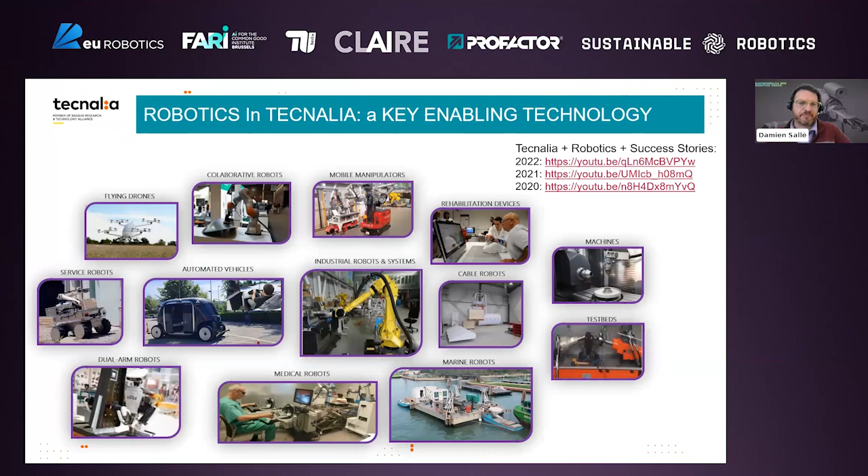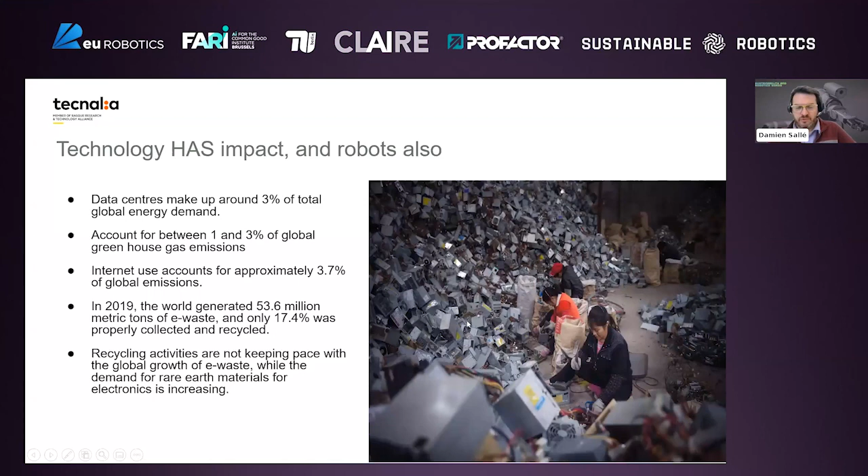So we're all in this webinar very aware that we need to do something if we want to keep life on this planet possible. We are also roboticists or interested in that, so we should be aware that our technology also has an impact, both because we create lots of electronic waste, and also because we use lots of energy for these robots to be active.

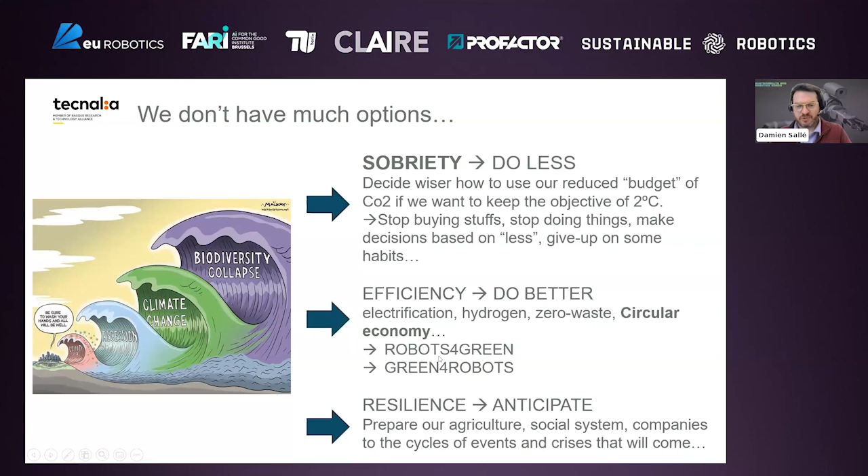So we're going to talk about efficiency, how to do stuff with robots, but the first thing we should do as a society is to focus on sobriety. So do less and decide what we want to do with the budget that we have, the CO2 budget of activities, if we want to keep the objective of 2 degrees. Okay, I think we don't hear it enough. We should also decide to not do things. When we decide to do things, we should do them better, more efficiently. And here we have ideas about robots for the environment, robots for green, and also how we can improve the robots themselves. These are 2 points that we're going to look at today.

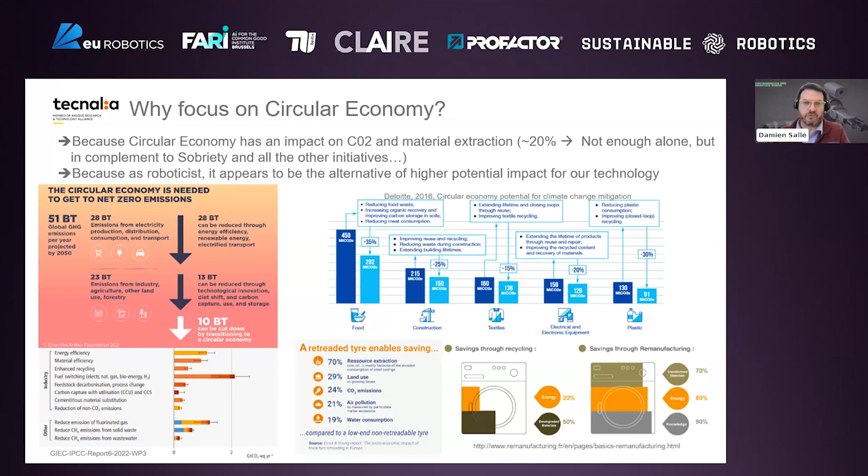So when a few years ago I wanted to apply robotics to provide one more grain of sand on that, I asked where we should focus. And we decided to focus in Tecnalia on circular economy because for robots, it appears to be a good sector where we can do something. And also we can apply automation and robotics to a sector that actually has an impact on CO2 and material extraction, about 20%. So of course, it's not enough. Of course, we need to change the energy sources. We need to go for electrification, stuff like that. But robotics can't help on that. So circular economy is one of the possible entry points for us.

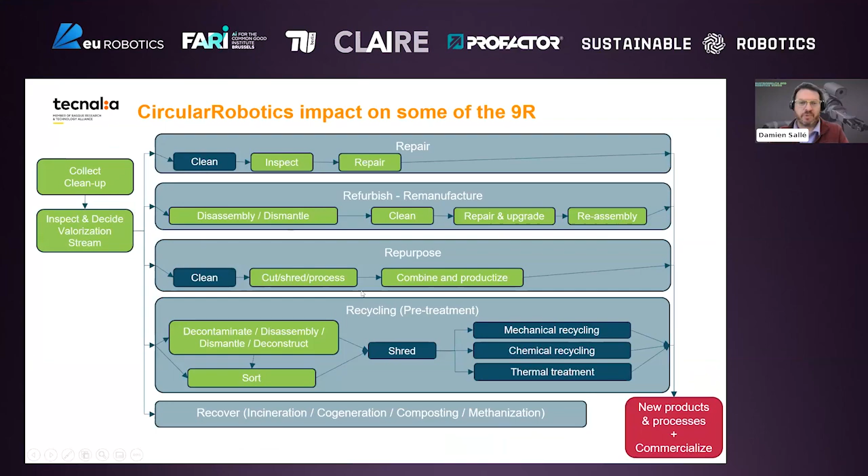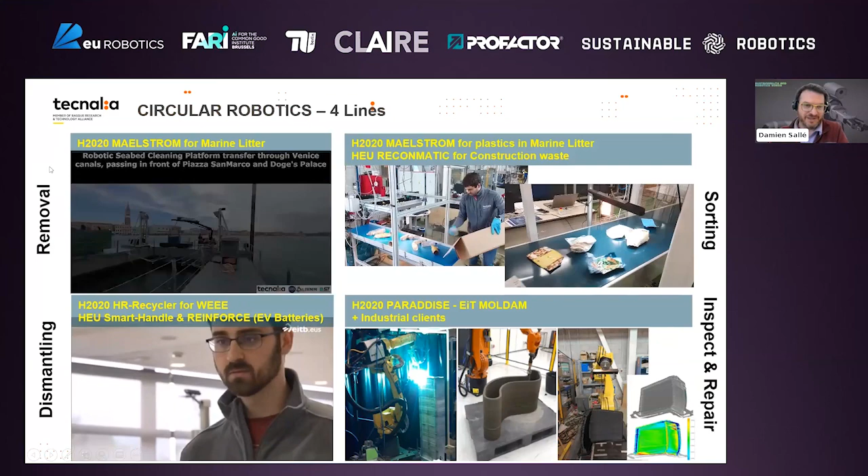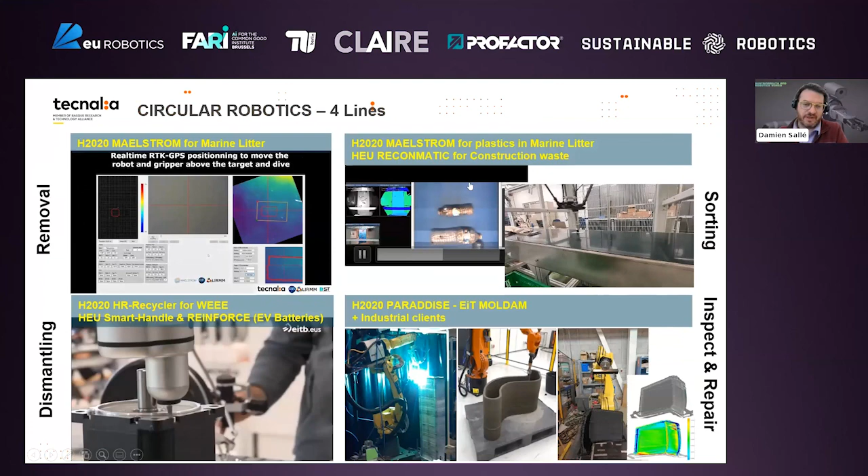Okay, so we had a look at what processes in this circular economy robots could impact. And we launched different projects, different lines with EU funding at the moment. We have a few clients, but it's not very profitable: cleaning the environment, as Sharat mentioned, removing plastics from under the sea, sorting waste from marine litter, construction waste, other streams, stuff like that. We now also work on dismantling electric vehicles or electronic components. And there's also a fourth line on inspection and repair.

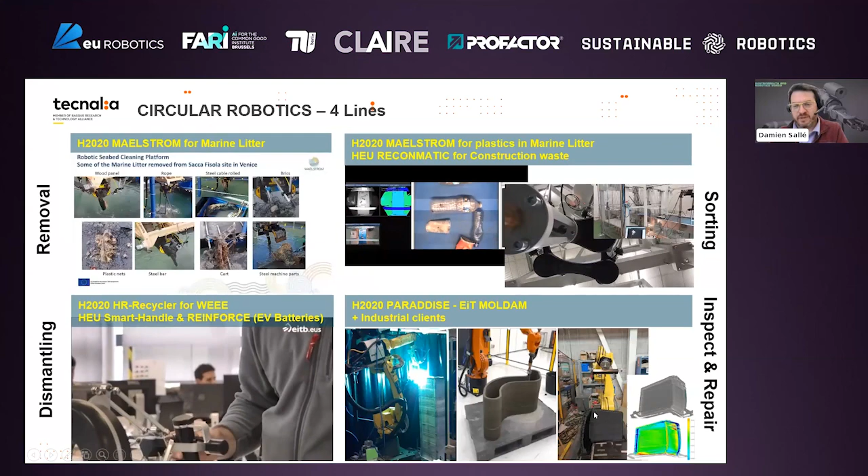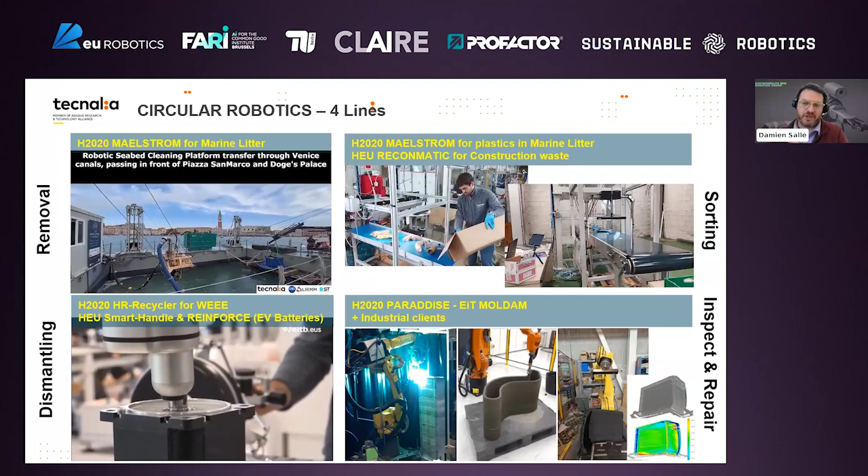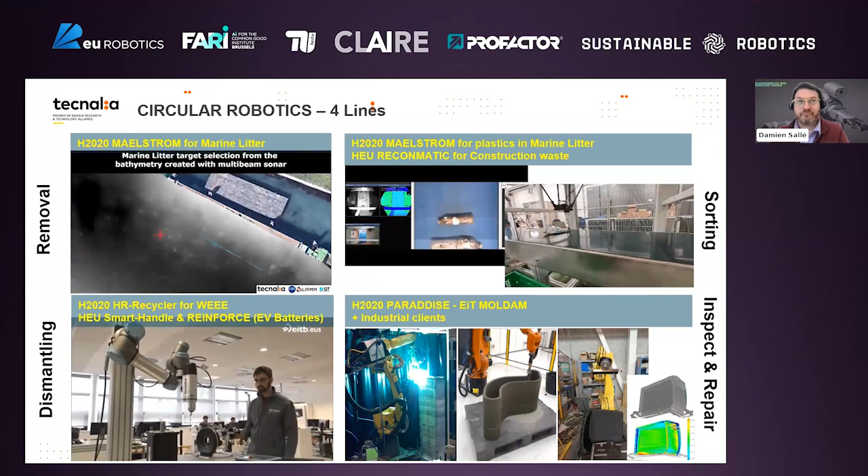We can use robotics, 3D vision, artificial vision, 3D printing, stuff like that, so that we can repair and maintain and increase the life of the components. Today's webinar is not so much on this part, so I will skip it here. But I think it was important just to mention that robots can also be used to try to improve, let's say, the impact we have on the environment.

Now, the other important question is, could we make robots that impact less? Okay, we've seen the first presentation where they propose polymers that can repair themselves, that can be recyclable. That's good. We had a talk just before on LCA. I will come back to this point at the end of my presentation.

But if we talk more from an engineering perspective, robots are not a major contributor to CO2. We don't move trucks around a lot, okay? But still, it's a complex electrical machine, and so we can try to improve them. We can take the part of the robot manufacturer and apply eco-design to the robots, just like any other machine: make them lighter, design for maintenance, design for dismantling, so that we increase the lifespan of the machines, or allow them to be more easily dismantled and recycled.

Monomaterial is very important in all these aspects, so that if you want to recycle, it's made of the same material, it's much better. An important point for manufacturers would be that they provide the ability to upgrade the robot after its first life. For example, in automotive plants, when the line is at the end of its life, the robots are still very powerful, very useful, but usually they're quite old. Not the robot itself, the control unit.

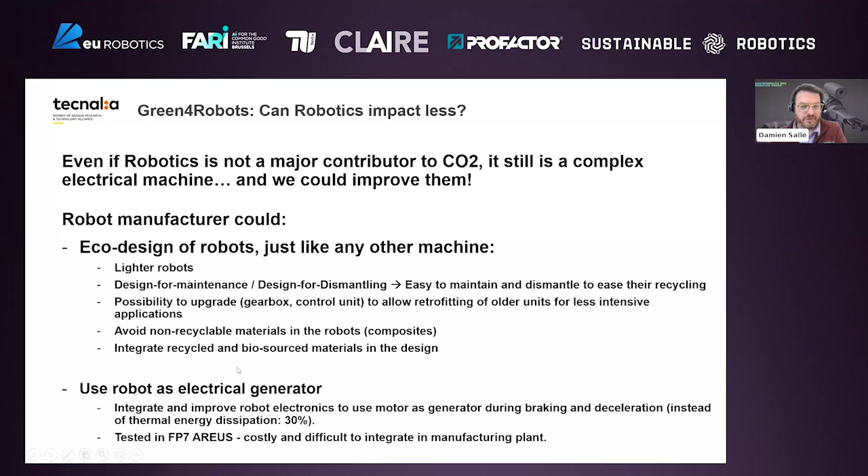We can also have an impact as users of robots or integrators, depending on which is exactly your position. And here again, in this project, KUKA, they worked a lot about where could I put AI into the design cycle of the robot. And they made an optimization of this cell, which is a typical cell for welding automotive parts. If I actually optimize the placement of the base of the robots, doing exactly the same process, exactly the same cycle time, they can reach 30% energy reduction.

So it's a bit of AI, it's a bit of time, it's a bit of optimization that has an impact also, but you get a 30% reduction of energy. And in that case, a peak power reduction of about 50%. So also maybe you can use smaller robots, which also have smaller impacts. Okay, so it's a bit trying to look at exactly what you need and not just pick the one that looks the best.

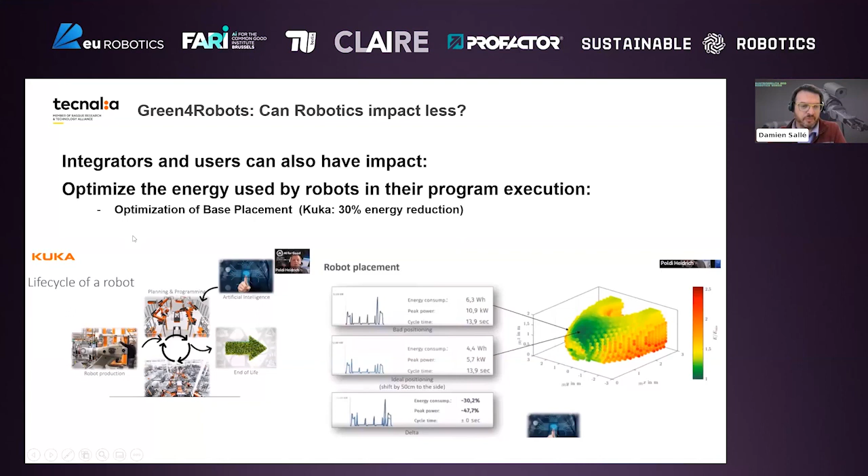Optimization also not only on the base placement, but on the motion planning. So that's computation of the trajectories of the robot, the acceleration patterns, the actual motion that the robot does, which is the one that consumes the energy. Okay. And here, the findings that they had are also quite intuitive, no?

Today, when we program a robot, we all like a lot to put it full speed, full velocity, full acceleration, and so on. And so we have a robot that goes very quickly to a point, but then he has to wait. Wait because there's a peripheral that needs to do something, or wait because there is a part that is coming, something like that. So we use the robots at maximum power, and then we wait.

If we optimized also the scheduling of the tasks inside the cell, we would reach exactly the same timing so that we can operate the process of the robot, but we would do that with much less energy. And so when they simulate that with also the partners on this project, these curves are the ones they get, reducing a lot the peak and also reducing the overall energy consumption by again 35%. Looks like 1/3 is a nice number in our project, but that's quite interesting.

And this has nothing to do with the hardware. So you keep the same cell, you just optimize what you do, when you do it, and how you do it. So it's 30% gain for everybody in the world.

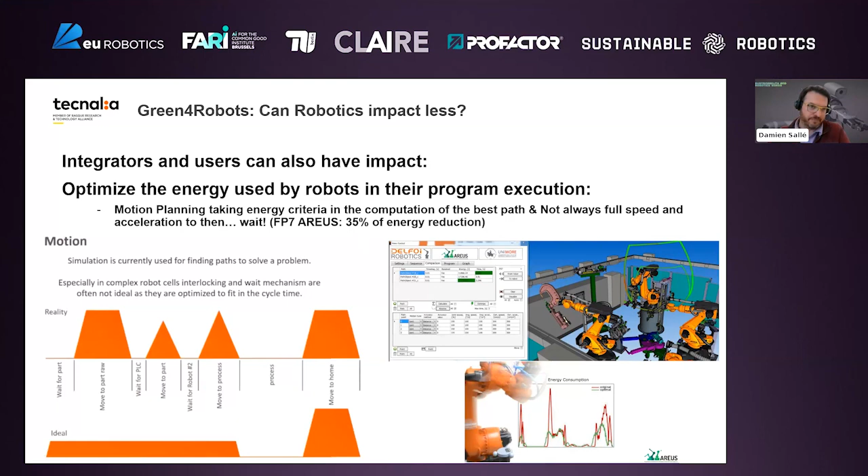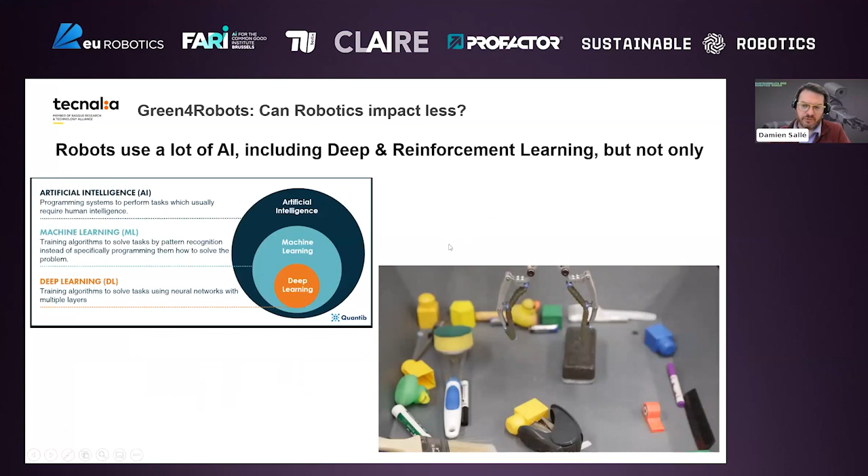All these robots also use lots of AI, which can include deep or reinforcement learning, like we see in this video from Google about optimization of a grasp, or at least learning how to grasp objects. But in all the applications that we do, for recycling or for circular economy, for any robot now, we do a lot of agile and flexible robotics.

We use a lot of motion planning. We use a lot of cameras, 3D sensors, optimal planning. This is on a daily basis, okay? We usually do that for the complexity of the application that requires the robot to adapt itself. So that's positive for the deployment of robotics technologies in the companies and in the applications. But it requires lots of AI. That is not always deep learning. It can be some modules of deep learning, but not only.

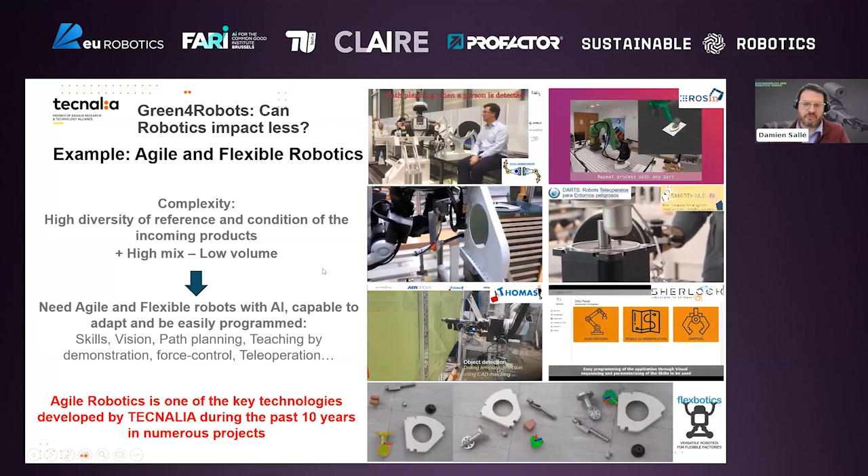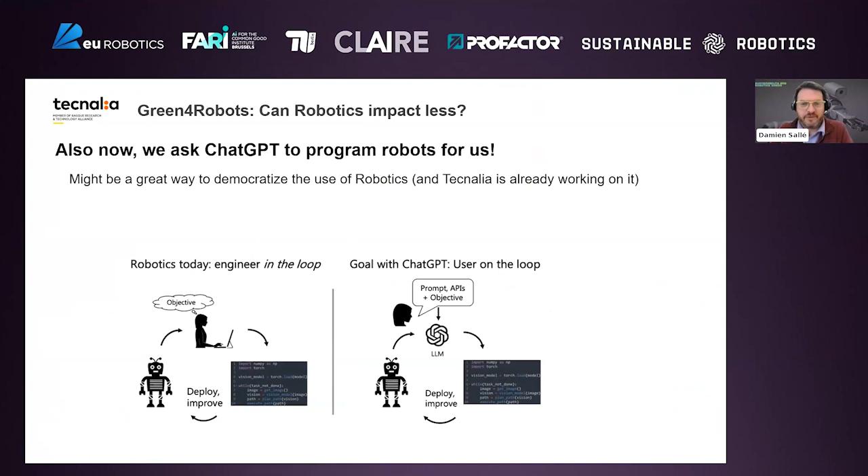And since last winter, we also saw a lot of ChatGPT everywhere. And now we also start to see ChatGPT programming the robot for us. Those are examples that were provided by Microsoft some months ago. We also do that in Tecnalia. We're also using this generative AI to ease the deployment of these activities. And that can be good because it lowers the entry level for people to program the robots to make more robotic applications.

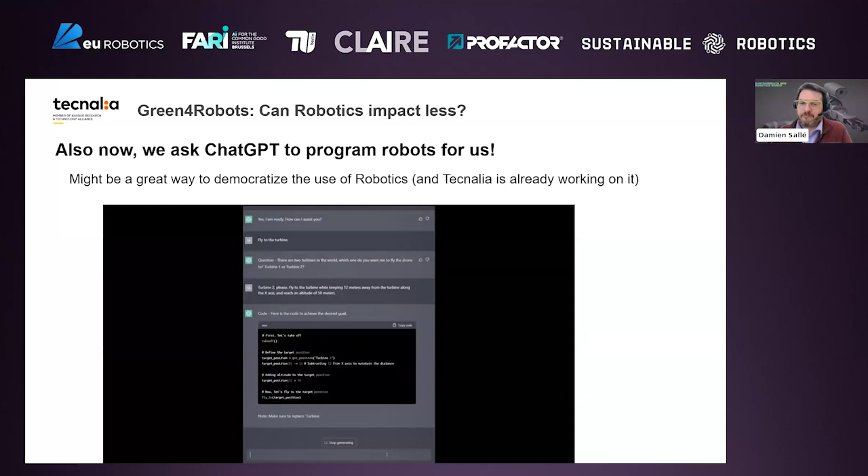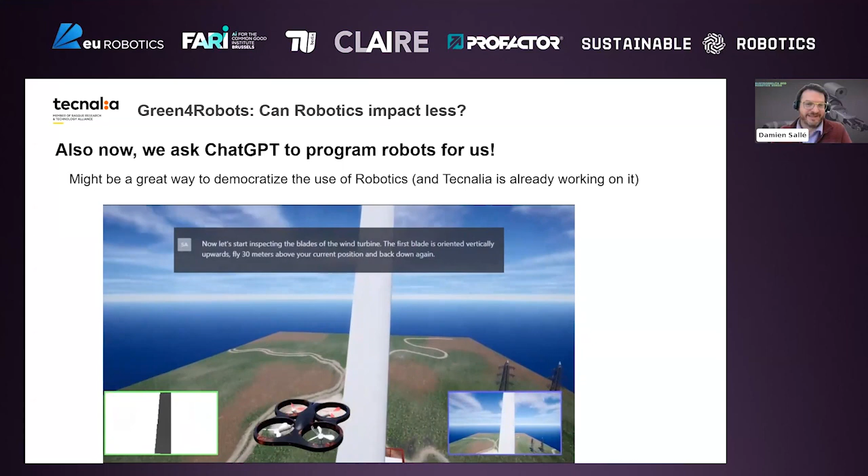But well, it's ChatGPT. It's known to be a very, very energy-intensive training model. So it raises lots of questions. I'm actually thinking myself about what my positioning is on that. It might not be so positive, okay? So if you look at AI in general, it's very difficult to get numbers, to get information. That's the one I got. If you look at digital, you see that it's about 45% during production of the digital hardware, let's say, and 55% use, for the generation of CO2 and impact in the two phases.

When you look at training an AI model, a quite large one, it's like 5 times the CO2 emissions of an American car during its full lifetime. So it's not nothing, okay? And the thing is that the more we go with time, the bigger the models. You have GPT-1, GPT-3. I don't know where GPT-4 is. I don't know where DALL-E and all these ones are. Probably much higher on this curve where we see the training compute requirements, okay?

So this translates directly to electricity, to energy. It also translates directly to hardware in the data centers. And the more the data centers grow, the more we need GPUs, more powerful GPUs and so on. So there's lots of turnover in the hardware and the data centers. So basically, AI training is very, very consuming. It's very, very impacting. There's no real data about that, so it's difficult to know. But we should all be aware of that and have a basic thinking.

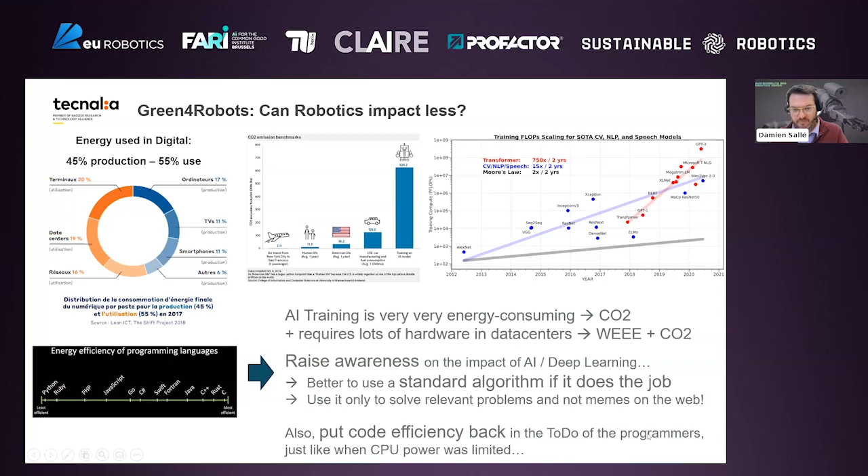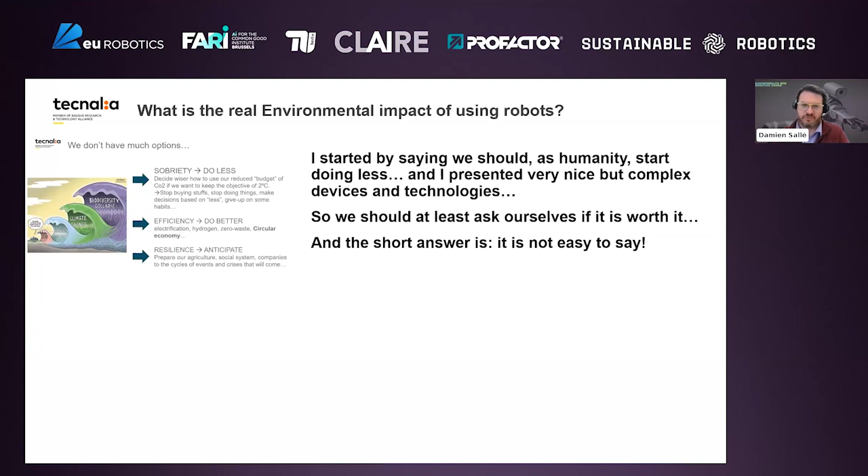So we started this discussion saying, okay, we should do less. And I'm talking all about AI, ChatGPT, robots, sensors, and so on. So one big question that we should ask ourselves as users is: is it worth it? And it's not so easy to say, okay? Robots are used in many environments. They do have an impact. And how can we evaluate if this impact makes sense? Or can we compare these positive aspects that they bring with the CO2 emissions, with the impact on biodiversity, on the ecosystems, economic sustainability, and so on?

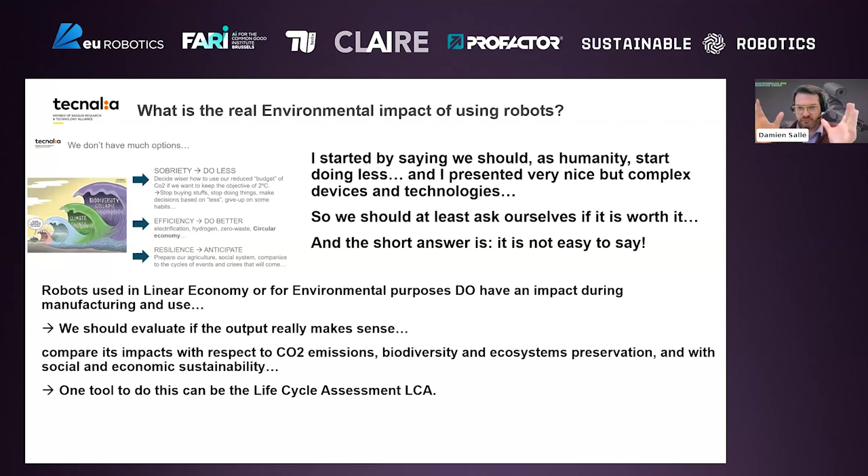So one tool to do that is the LCA, life cycle assessment, that we just had an introduction to before. What I will do is take an example. In one of these projects, in this case, it's the sorting robot that we use in the Maelstrom and Recomatic projects to sort marine litter and construction waste. We want to do this LCA. We have experts in Tecnalia to do that. I'm the robotics expert, I'm not the LCA expert. So we worked together. They use software for that. The one we have is SimaPro, which is used quite a lot.

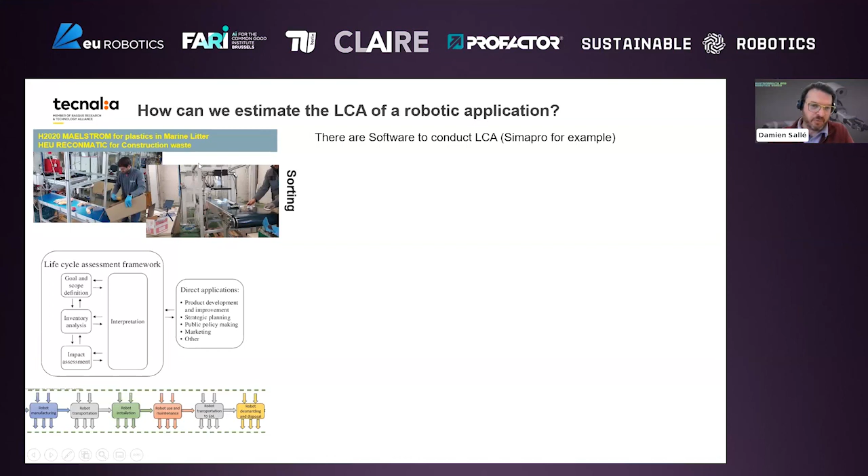And we see again this process of LCA where you need to define the goal and scope, the inventory, the impact assessment. You need to take all the steps of the use of your robot application in the life cycle and so on. And so when I take this example, basically, I'm a roboticist. I know what I put. I have a Quattro robot from Omron. I have a NIR camera Redeye 1.7. I have some lighting, I have a belt, I have some motors. So this stuff, I know what I have. I have steels and paint, okay? But how do I put the Omron Quattro robot within this inventory?

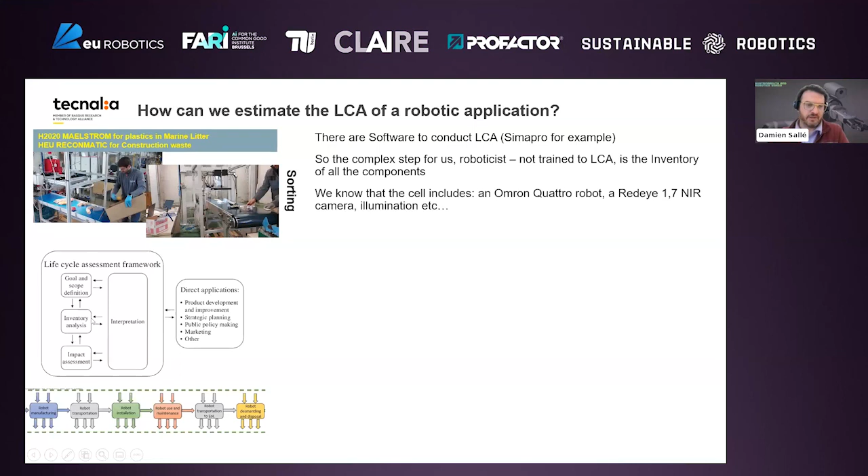The issue is that in this software, in our case, we decided to put that in kilos, but they need you to have this inventory of basic materials so that you can use databases and they know the impact of bronze or reinforced steel with respect to injection steel, for example, okay? So the big issue for us, and the way I see a limitation in LCA, and that's something that should be improved, or maybe you have a community of LCA and robotics people doing a kind of catalog or something, is that we don't have the info. When you contact the robot manufacturers, you don't have the info. Nobody tells you anything more than there is in the data sheet.

And you don't even know where the basic materials of the robot come from. Is it built in China? Is it built in Europe? Is it built in the US? You don't know that. So it's very difficult to have a good or accurate LCA on that. Also, when you want to put that I'm doing AI deep learning training on the waste categories with a GPU of that category during 1 week in the cloud from Amazon or from Google, that doesn't exist as a category. You have electronic components, not even sensors. Or if I take a mobile robot, we use a lot of LiDARs, 3D LiDARs. What is the difference between a 2D LiDAR and a 3D LiDAR? There's no way to know that.